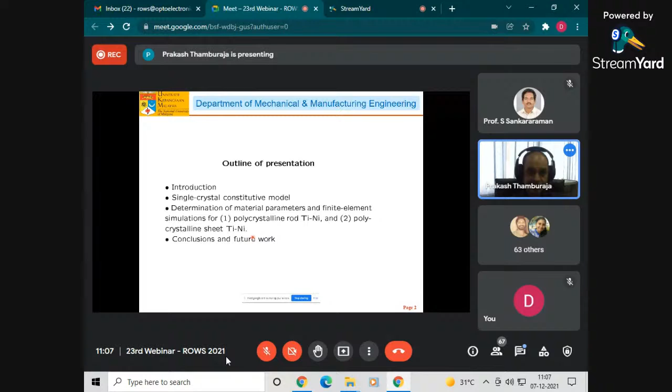They also have a lot of traditional use in the biomedical field, where they're used to make stents and orthodontic wires. Stents are basically put into arteries in your heart or kidneys, and they're quite widely used. They're slowly replacing steel-based stents, which are not very ductile compared to shape memory stents, which are much easier to deform.

They're also widely used in the MEMS field, as well as in micro actuators and temperature switches in IC engines and rocket engines.

There are different types of shape memory alloys in existence. One of the earliest was discovered in the 1960s by the Naval Ordnance Lab, with a composition of nickel titanium. Although there are many other shape memory alloys made from copper, indium-thallium, and even recently iron-based shape memory alloys, which are much cheaper, the polycrystalline form of nickel titanium is the most widely used.

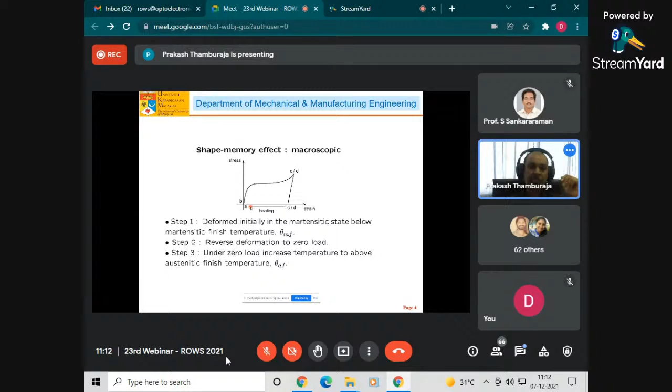As you apply stress, the boundaries within the plates and interplates move as well, and they're sensitive to the sign of stress. If you stress it in direction 1, the plates move in one direction, and if you stress it in the direction completely opposite, the interfaces will move in the opposite direction. It's very similar to dislocation slip, except that this is twinning.

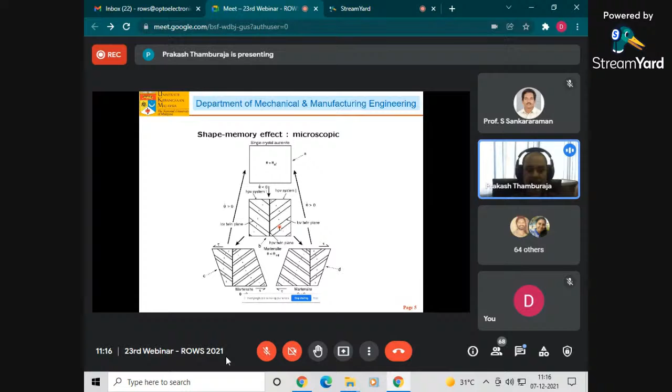The LCV detwinning is basically the conversion of one variant within the martensitic plate through the motion of these interfaces. So there are two different types of twinning that occur here, and the phases are basically mirror related. That is the manifestation of twinning, or the description of twinning. They are related through a transformation from one space to another.

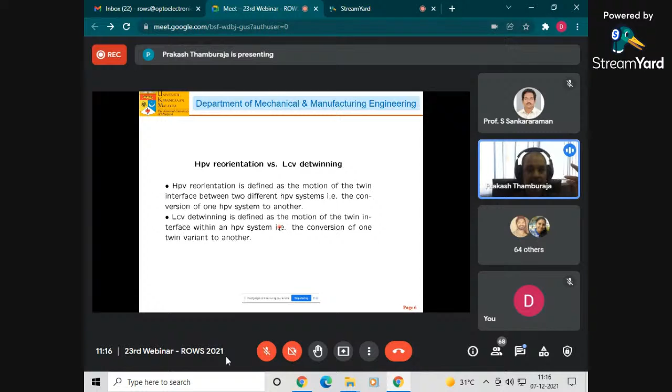This problem is seemingly complicated, but we are able to make it more tractable by keeping track of the HPV reorientation and decoupling it from the LCV detwinning. That is basically the name of the game that we need to keep track of.

So what happens during martensitic reorientation and detwinning in shape memory alloys? We take different samples, bought off a catalog, and tested two different types. One in a rod fashion, a nickel titanium in polycrystalline form in a rod configuration, and we also bought a polycrystalline sheet.

This is manufactured by a rolling process. When you roll something, you have preferential directions. Likewise, when you extrude something in a rod texture, you also get some preferential directions.

You can clearly see we have done some laboratory tests for nickel titanium rod here. We look at a rod under tension and compression. In tension, you have a sample and you pull it. We also performed a compression experiment where we cut a cylindrical sample and compress it.

When you do this experiment, you clearly see some anisotropy, or rather asymmetry, in the response. Initially there's a similar response up to about 2% strain, but as you keep pushing or pulling beyond that, you get a divergence of the stress strain response in tension and compression. The tensile response is much more ductile and malleable compared to compression, which shows more of a locking response quite early on, about 2 to 2.5% strain. Clearly the rod sample exhibits a tension compression asymmetry.

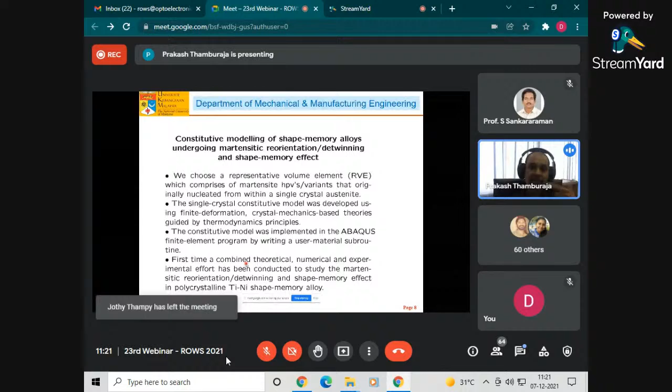This slide shows the governing variables in our mathematical model. The most important thing is that you need to specify a potential energy. In this case we use the Helmholtz free energy potential, and from there we need to use fundamental mechanical balance laws and thermodynamics laws to derive the constitutive equations.

For example, with regards to mechanical laws, you have to look at balance of linear momentum and balance of angular momentum, and for the thermodynamics laws, we have to use the first law, second law, and the dissipation inequality. All these tools we use to derive the constitutive equations.

Finally, you also need to have some kind of description for the change of microstructure in the body due to twinning. That is all obtained from crystallographic theory.

This is called the phenomenological theory of martensite transformation. You can use geometry to calculate the crystal lattice vectors and so on, quite simply using basic mathematics. You can also use experimental analysis, but it's a bit more arduous. We've used mathematics to calculate the twin plane vectors, the twin plane normals, the shear directions, and so on and so forth - we've used the theory to do so.

And then for the first part of my presentation, I will briefly describe the experimental results and the computational results for a nickel titanium rod, for a polycrystalline rod.

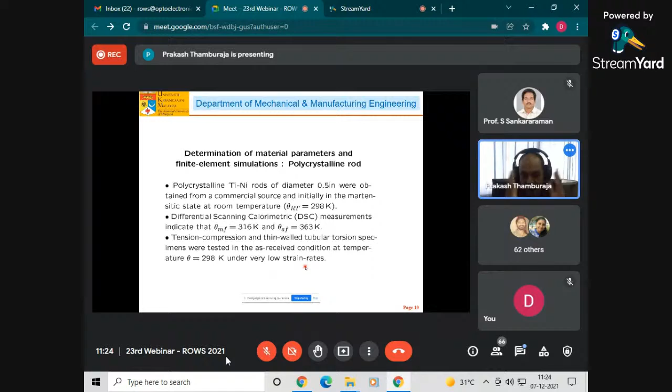We've also performed these experiments under very low strain rates to keep the temperature conditions constant - we want an isothermal temperature condition for now, so we don't want to complicate matters, we just want to look at the mechanical response.

This is the crystallographic texture of the polycrystalline rod, as you can see. So you have to do some XRD, and these are the crystallographic planes. The austenitic phase is basically BCC for nickel titanium, and the martensitic phase for nickel titanium is basically monoclinic.

It's monoclinic, so very low symmetry, and high symmetry at high temperature. These are the crystallographic textures in the 111, 110, and 100 planes.

You can do an XRD measurement, and the second column is the numerical approximation to the actual experimental crystallographic texture. You can take as many grains as you want to make it more accurate, but then you increase the amount of information in the computational framework, and the simulations take longer. So it's a balance of how many crystal orientations you need to match the experimental texture. If you can get away with as little as possible, the better.

This is to see how well it fits the experiments. You don't want to burden the computational capabilities too much, so it's a balance between information and quickness of the computer simulations.

This is the experimental sample we have here, this is the geometry, all in inches. This is a dog bone sample. We basically assume that a small part of the sample at the gauge section, which is polycrystalline in nature, can be arranged randomly.

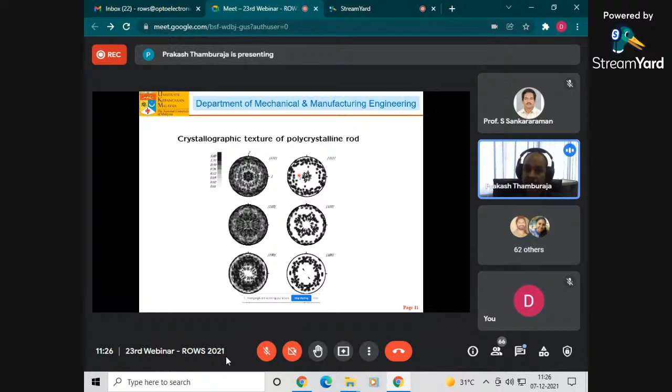So we have randomly oriented grains, where each grain has a single crystal orientation from this crystallographic texture, from the XRD measurement. This is the numerical representation of this experimental data.

Each cube here is one finite element, which represents one single crystal of austenite, now completely martensitic in phase. They are oriented in space in a certain specific way.

Then we perform the single crystal, polycrystalline experiment. This is the stress strain curve. You can clearly see some elastic deformation here, and then elastic plastic deformation, and as you keep going it sort of keeps going up.

The reason you get some kind of hardening response is because when the twinning response is completed, you get elastic deformation. This indicates that some grains have already completed the twinning process, but some are still twinning. So it's the competition between elastic and elastic plastic deformation which is causing the hardening response.

This is the fit of the mathematical model and the computational framework, and you can clearly see that the mathematical fit is quite good with the experimental results.

We also performed a homogenized model of the polycrystalline, where we assume that all crystals are deforming the same way. The computations are about two orders of magnitude faster, but you have less information with the assumptions, and it's a constraint model. You basically obtain an upper bound solution for this case, assuming all crystals are undergoing the same deformation.

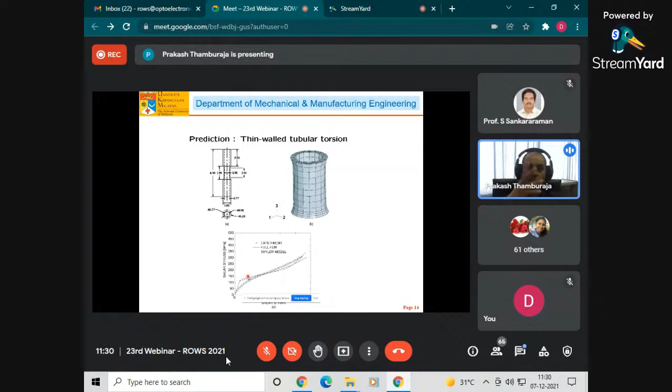So it also gets captured by the constitutive model, and the homogenized model as well is able to predict the stress strain curve to good accord, albeit with slightly premature locking, but still the overall response is quite good as well. So we are doing quite well in a multi-axial loading state.

So let's make things more interesting now. Let's try to do a path change tension torsion. We use the same sample as the tubular torsion sample, but we deform the sample in tension first. We perform the axial deformation first to about 3.5 to 4% strain.

So we deform it to 3.5% strain, and we fix the axial strain. Once the axial strain level is fixed, we perform a shear simulation at the same time, with the shear strain increasing with the fixed axial strain. So you'll get two types of responses here: an axial response and a shear response. This is the axial stress, axial strain response.

So this is basically the same response, experimental response, as the one I showed you previously, about 3 slides ago. And obviously the model will be able to match this because we've actually used this experimental data to fit for the material parameters.

But what is interesting is that once the axial strain is fixed and you perform the shear strain experiment, this will be an independent prediction. The shear stress, shear strain response is also well predicted by the full FEM model and the homogenized Taylor model as well. So this is a pure prediction.

But what is more interesting is you see a transient effect: as the shear strain is increasing and the shear stress is increasing as well, the axial stress response actually reduces. So there's a drop in the axial stress response.

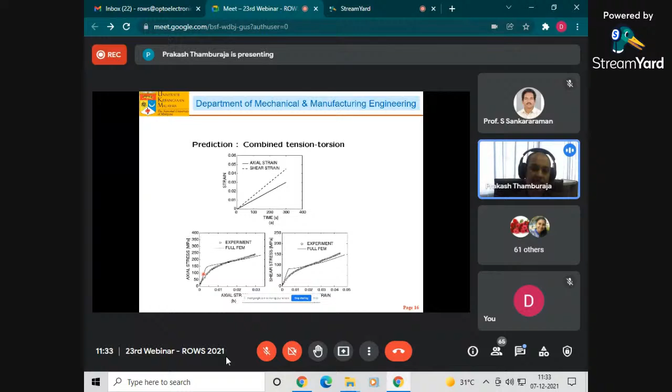So it's not fitting anymore - this is a pure prediction of the response. And as I mentioned, despite the complexity of the material and the microstructure and the different types of twinning responses that you can actually get in this material, it is doing quite a good job so far.

So let us see, maybe we got lucky with this particular rod sample. Let's see whether we are able to use the same mathematical model, of course calibrating the different constants, because we're going to look at a different material with a different type of textured material - a sheet material in a second. That is the true test.

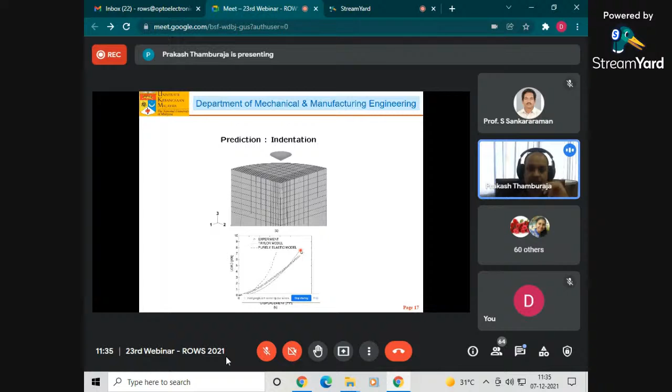So the second part of my talk is basically what I was briefly describing earlier. We want to see whether we got lucky with the polycrystalline rod. So we look at a different type of textured shape memory alloy - a polycrystalline sheet material.

So we've again purchased the polycrystalline sheets, but it turned out that we could only buy a sheet exhibiting superelastic response at room temperature. Superelastic response, as I'll show you in the graph, basically describes a complete reversible transformation at a certain temperature, in this case below room temperature.

So now what we need to do is make the material in a fully martensite state, so we have to do these experiments in a temperature chamber. We have to cool it with liquid nitrogen and do the experiments at a temperature lower than 298 K. Before doing so, we've also done a DSC experiment to check what the critical martensite temperatures are. The martensite finish temperature is 207 Kelvin, so we have to cool down the temperature chamber below that to ensure the material is completely in the martensite state.

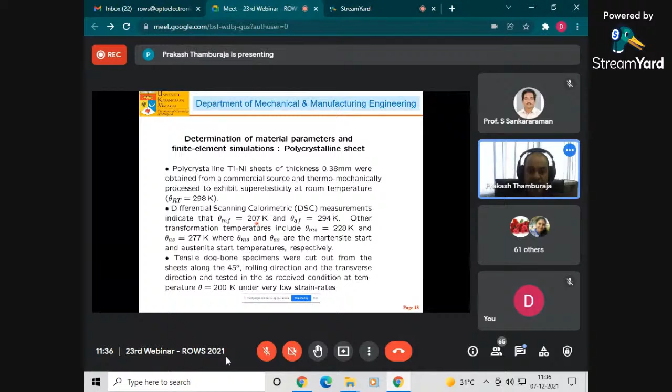So we've machined out samples along the rolling direction, the 45 degree direction, and the transverse direction. This is a very standard experiment done by mechanical engineers to characterize anisotropy in a sheet. These are dog bone samples, machined in different directions, and we've tested them at 200 Kelvin, under very low strain rates. 200 Kelvin is below theta MF, which is 207 Kelvin, so it is completely in the martensite phase.

We've used this experiment to determine the material constants in our mathematical model, and once we've fit the material constants, we don't change them anymore, because we need to do independent predictions.

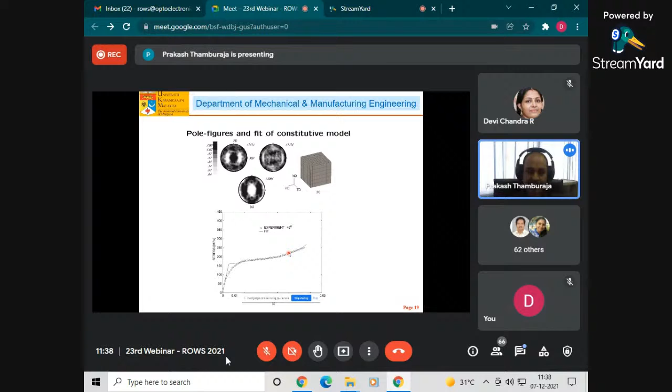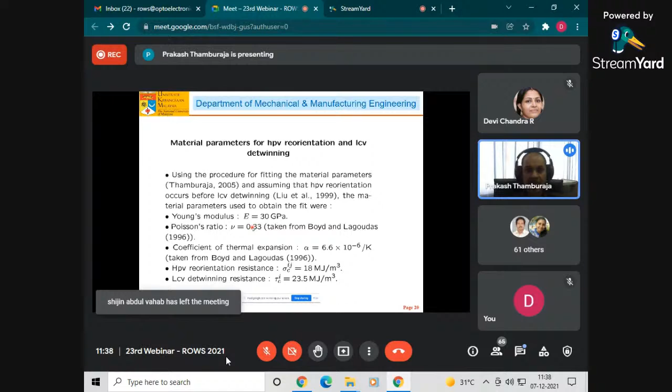So now this is basically the list of material parameters - there's not that many actually. Of course we've made a lot of assumptions, but we want to see, even with these first-cut assumptions, how far we can go to predict the experimental response along the transverse direction and the rolling direction. This part is not too important.

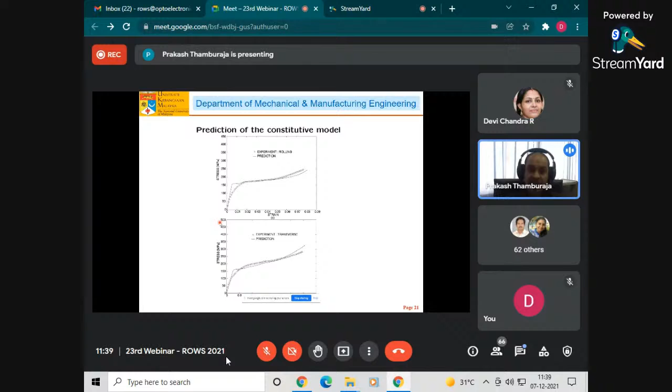Okay, so this is the experimental response along the rolling direction, and here's the experimental response in the transverse direction. You can clearly see that the mathematical model and computational framework are able to predict these experimental responses along the two testing directions to good accord. Quantitatively, they're actually quite good.

What is more important is that if you plot the numerical responses along the rolling and transverse directions, you can clearly see that the mathematical model is able to duplicate even the rolling-transverse anisotropy in the material. We are able to predict the tension-compression asymmetry in the rod sample, and also the rolling-transverse asymmetry.

For the sheet material, the transformation strains are higher along the rolling direction, and we're predicting that. The stress levels for actuation are also higher in the transverse direction, and that is also predicted by our mathematical model.

Since we have already done two textures, we believe the model can be extended to simulate the deformation response for any other texture as well. That's the hope - we've done at least two textures, so we hope it can be done for n textures. We leave that exercise to other researchers; we don't want to be doing everything.

I was also at a phase of my career where I wanted to try something different. This was basically some of the last work I've done on shape memory alloys - quite some time ago.

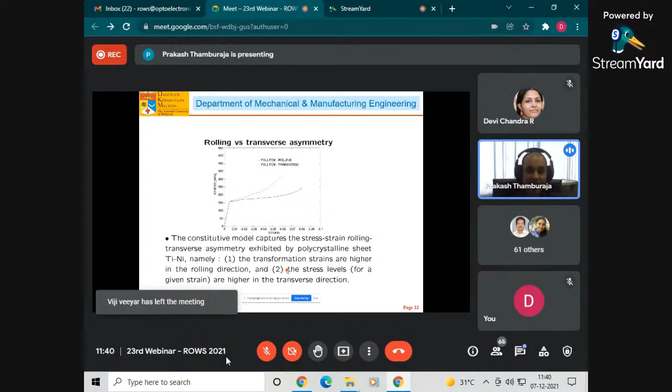Now finally we come to the superelastic effect. What is the superelastic effect? This is the effect manifested by shape memory alloys at temperatures above the austenitic finish temperature, and this is one example of an experiment under constant temperature.

You start off at this initial state, completely austenitic, and as you deform it, you get some elastic behavior and then some kind of elastic-plastic transformation from the austenitic phase to a martensitic phase due to phase transformation.

As you have phase transformation, you have a release of latent heat. When you have reverse loading, you get a reverse transformation from martensite to austenite phase, and the effect of latent heat being absorbed. So if you touch the sample, it'll be cooler along the reverse loading cycle, and heated along the forward transformation. When you release the stress, you completely recover your full state.

It looks as though the material has not gone through any deformation, but actually it has some hysteresis imparted in the material. You get some dissipation because of the motion of austenite to martensite transformation, and release and absorption of latent heat. That is basically the superelastic effect.

The shape memory effect is basically a combination of the detwinning and HPV reorientation effect and a reverse transformation from the martensitic phase to the austenitic phase. It is manifested by this experiment here - this is the stress-strain-temperature diagram.

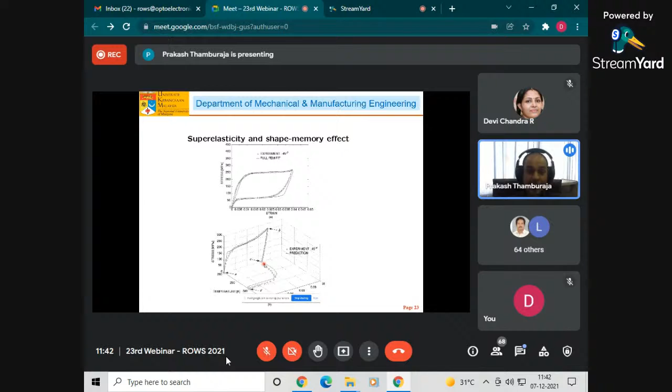So you can clearly see this for the 45 degree sample, and then you do the same thing - don't worry about the material constants here - for the rolling direction experiment and the transverse direction experiment as well.

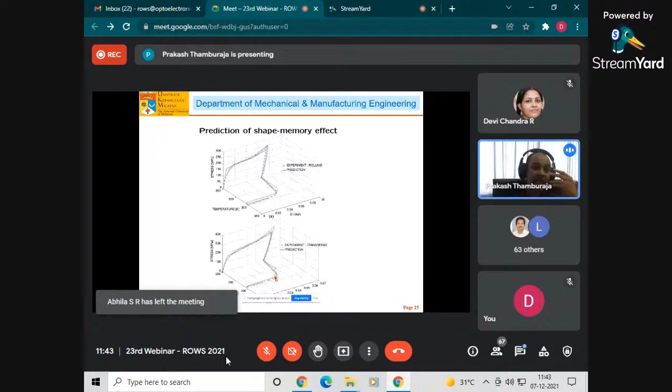You can clearly see that whenever you reach a certain critical temperature, you get a complete wiping out of the remnant strain, which is about 6%, quite large. And it happens about the same time that the experiments actually show that. So what happens here? The conjecture is that we believe the martensitic phase has completely transformed into the austenitic phase.

Okay, so we want to see whether that is true. So we show the results, the finite element simulation results. And lo and behold, actually that does happen.

So this is the state of the polycrystalline material in the low temperature state. 200 kelvins is completely martensitic. So if you increase the temperature to about 285 kelvins, you get a complete reversal of phase from the martensitic phase to the austenitic phase, and that's actually predicted by the mathematical model.

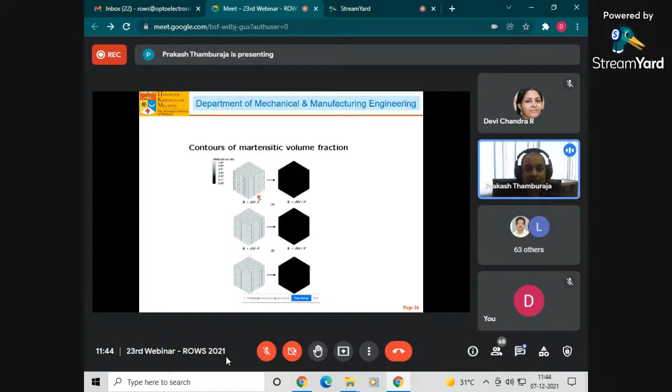And this is actually what happens in the experiments as well. Our computational simulation is actually able to predict the experimental effect to quite good accord. So that is basically the conclusion of our presentation.

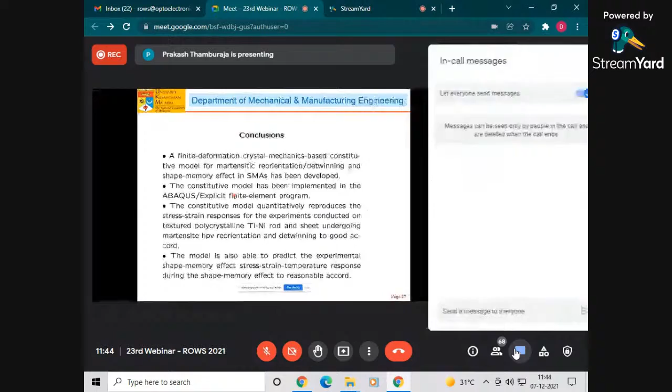So what we have achieved in this project is basically we've developed a microstructure informed mathematical model, or a crystal plasticity based constitutive theory, which takes into account the large deformation effects due to twinning and hpv reorientation in this material.

Because if we're looking at the samples in a single crystal state, the twinning shears can go up to about 28%. In fact, they've also discovered new shape memory alloys that can go larger as well. So you need a finite deformation type theory where you have to worry about Galilean frame invariance and so on and so forth. These concepts are quite familiar to physicists like you guys, frame invariance and all of that.

So we have developed a mathematical model to describe the martensitic twinning and reorientation in shape memory alloys. We've implemented this into a computational framework by writing our own codes, and implemented it into ABAQUS. The mathematical model and its computational implementation is actually able to reproduce the stress responses for experiments conducted on two different types of textured shape memory alloy, one in the rod state and one in the sheet state.

And we are able to predict the macroscopic response quite well. In other words, the stress strain response and the stress temperature response. And finally, the experimental shape memory effect is also reproduced quite well by our theory and numerical simulations.

Okay, so there's still a lot of work that needs to be done on it. I think part of the future work, which future researchers can actually do, is to include the dislocation slip within the twins itself. So as you keep on deforming it to much larger strains, you can get crystallographic slip.

But what happens is that you lose the technological benefit of the shape memory effect, because once you introduce dislocations in the twins, the twin faces don't want to go back to their original shape. So that is why you don't want to deform it too large. It needs to be sufficiently large, but not too large, because you lose its technological relevance for industry.

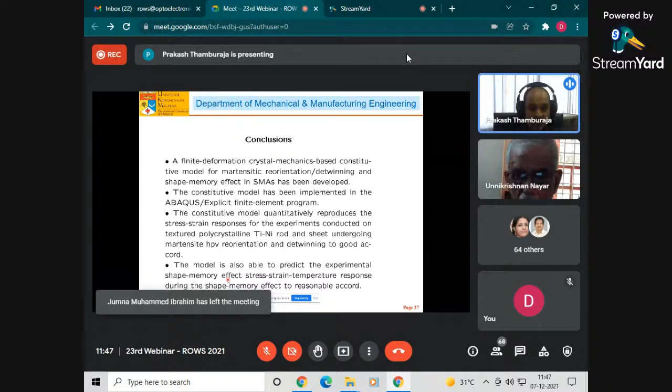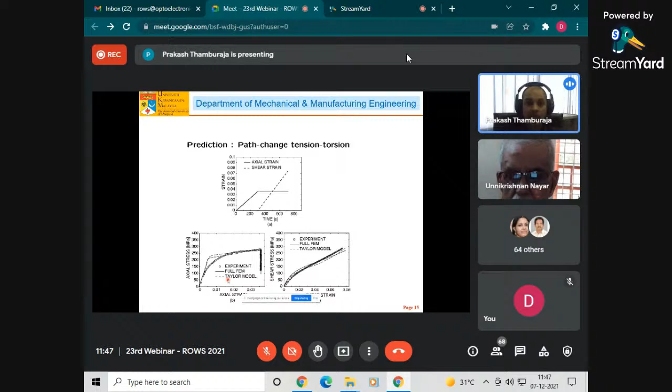So what we do is, that's actually a very good question, Professor. We actually machine the samples in a fluid bath. We want to make sure that the temperatures don't change so much, in order not to alter the microstructure as much as possible. So we make sure that it is done under a liquid bath, like an oil bath.

And the other thing that we ensured as well is that the sample sizes are quite large, because these are not micron or nano sizes. These are quite large samples, tens of millimeters. So whatever changes in microstructure actually happen a lot on the surface only, and it won't affect the large bulk of the sample. So we're basically getting the representative behavior of the sample itself in its as-received state.

The shape memory alloys, copper, aluminum, nickel, titanium alloys - so what are their names for daily life applications? What type of alloys are commonly used?

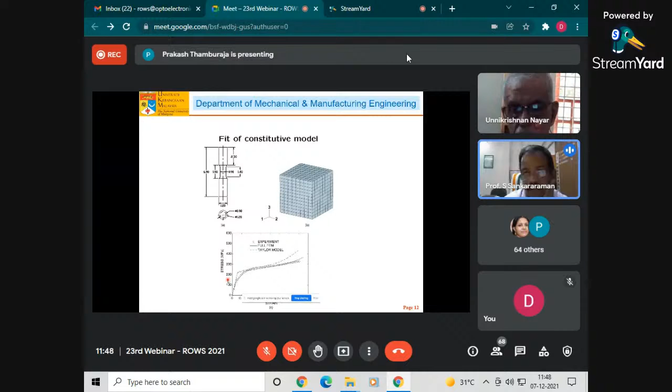The ones most widely used are basically this nitinol shape memory alloy, NITINOL. It is nickel titanium based alloy - NITI - and NOL is Naval Ordnance Lab. It was first discovered in the Naval Ordnance Lab in the US, and that's the most widely used shape memory alloy, the most famous brand name for one.

I'm not quite sure about the other shape memory alloys, but there are other alloys like copper, aluminum, nickel, which are also used, but the actuation strains are not as large as the nickel titanium ones. So nitinol is the most widely used, and you can buy it off the shelf.

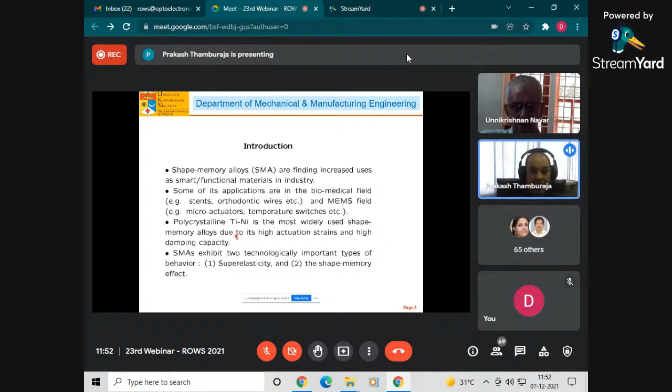But when you heat the sample again to a certain critical temperature above the austenitic finish temperature, you will not recover the strain caused by the dislocation motion - you will lose its ability to remember its shape. So there is a limitation to how much you can actually deform it.

So what people do to find the limit is basically stress it, unload it, keep stressing in very small intervals to see how much until, when they increase the temperature, you cannot get back and recover the permanent strain. It depends on how you thermomechanically process the material and what type of texture you have - so the actuation stresses, the maximum stresses, depend on how you make the sample, the thermomechanical process, and what type of texture it has, how the grains are oriented in space.

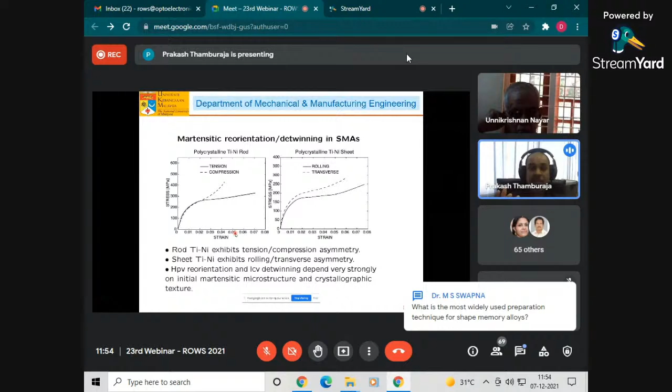When you plan to use such alloys, you have to understand the temperature range within which you are using them. The applicability is very important, and that is basically tailored by the amount of nickel and titanium in the sample itself. So very small changes of nickel and titanium in the sample will change the transformation temperature drastically. That is why when you want to use this in your body, you need a certain percentage of nickel and titanium which you can use.

Thankfully, this material is biocompatible. By itself, nickel is bad news, but titanium is okay. Nickel titanium together is fine, you can actually use it in your body. But if you're using this material in your body, there's a certain specific range of nickel and titanium percentage you can use for actuation purposes, to open up arteries. So it's a very tight tolerance, but people have pretty much mastered how to make this material for biomedical applications. It's quite a tried and tested method now.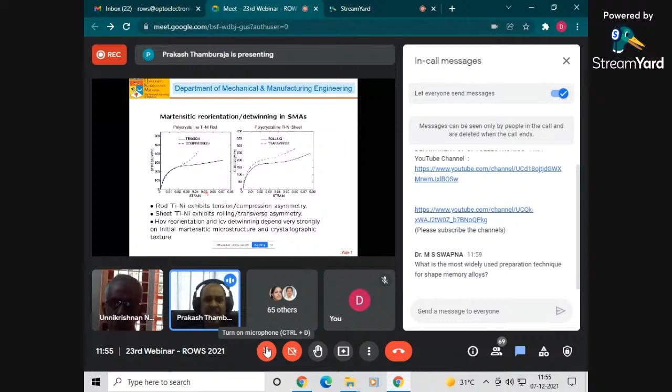There's also a lot of SMA research in India as well. I think there are a lot of people who used to be in GE and all that. I don't know whether you are familiar with Dr. Vidyashankar Buravalla - these people have actually used and done a lot of research on shape memory alloys over the years. So he's a good guy to know as well, if you're from India.

Oh, okay. Oh. Okay, that's a very good question.

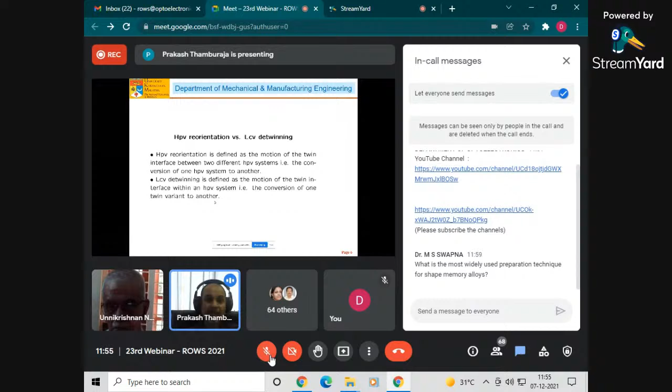The most widely used shape memory alloys come in the form of wires. The wire mesh is the most widely used. Why? Because one, it's easy to make a stent with this mesh, and secondly, another very important application is orthodontics - wires used for teeth correction and similar things, basically in wire form. So that's the most widely used structural application for shape memory alloys.

As for the preparation technique, these wires are basically drawn. They have a very high 111 type texture along the drawing direction, similar to a rod texture, but it will be a bit more sharp in the wire because it's more well drawn.

Okay. Hello, sir. Hi. It was a nice presentation, actually.

I have one doubt - how expensive is this material, SMA? For example, if we are using it in eyeglass frames, is it more expensive? Actually, it's not so expensive - a lot of this material in wire form you can buy off the catalogs, they do sell it. In the US it's quite easy and cheap. I'm not quite sure what the market is like in India and other places, but generally you can buy it off the shelf from any catalog, like the McMaster catalog. So it's quite cheap in wire form, and people actually use a lot of it in wire form to make meshes for eyeglass frames, orthodontic wires, and stent wires. So my answer is it depends on where you are, but at least in the US it's not so expensive, and in Malaysia too it's not so expensive.

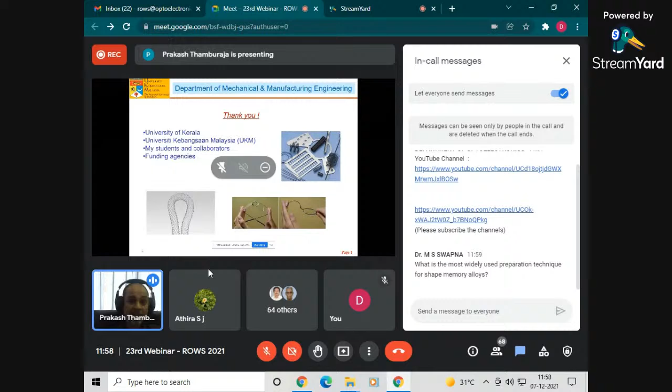Thank you. But it's still widely used, as I was mentioning previously. In fact, even in the optoelectronics field, they're actually used as photoactuators and so on. SMAs are very sensitive to temperature changes, so because of the light you get heating, and because of that you get the actuation, and so on and so forth.

If no more questions, we can conclude. Thank you so much once again.